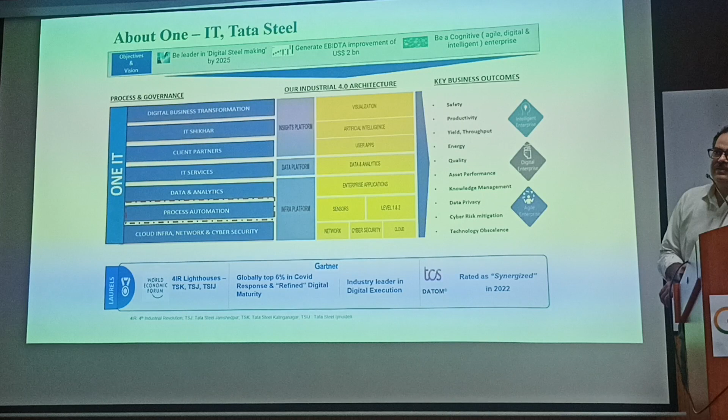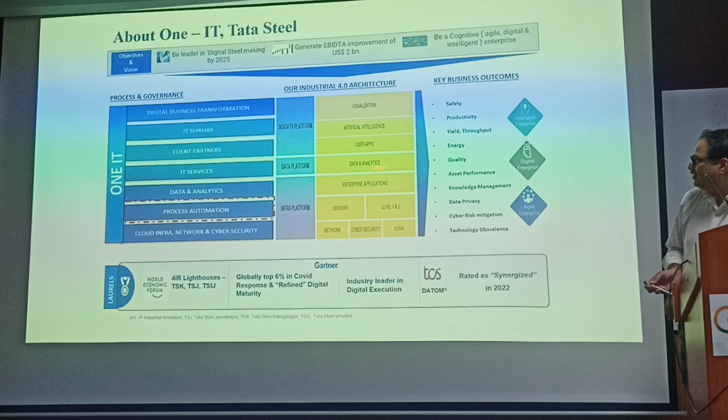Everybody must be familiar with OSI layers of communication. In industry, for our purpose, we have divided our different connecting levers into 7 layers. It starts with network, then level 1, level 2, then enterprise application, data and analytics, user apps, artificial intelligence, and visualization layer. This is the industrial way of understanding the OSI layer and utilizing it to convert into the desired output.

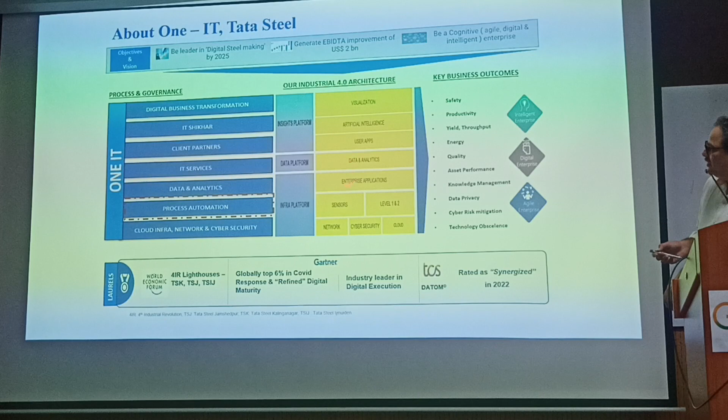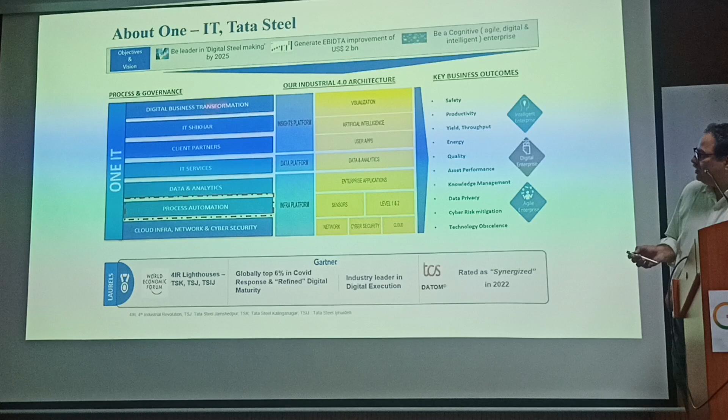And the key benefit is shown here—these are the benefits expected out of these 7 layers of architecture. All these things are supported by various experts in those areas, who are divided into various categories. So any IoT or Industry 4.0 solution needs to be backed up by people who understand that.

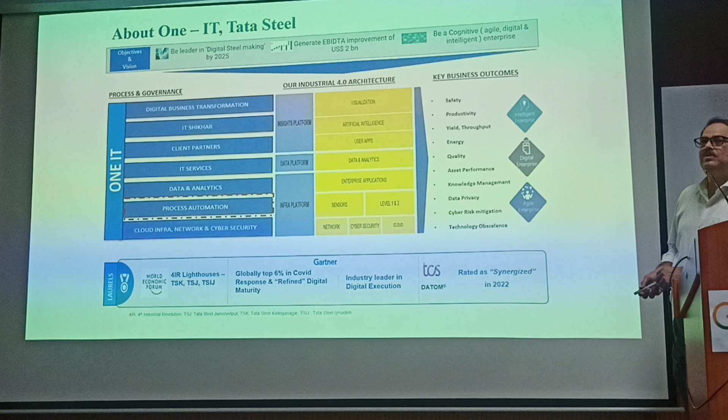So it's not that era where anybody can do anything. If you want to implement those things, you need to have people who are trained on that, who have expertise on that. Only then can you deploy all those things.

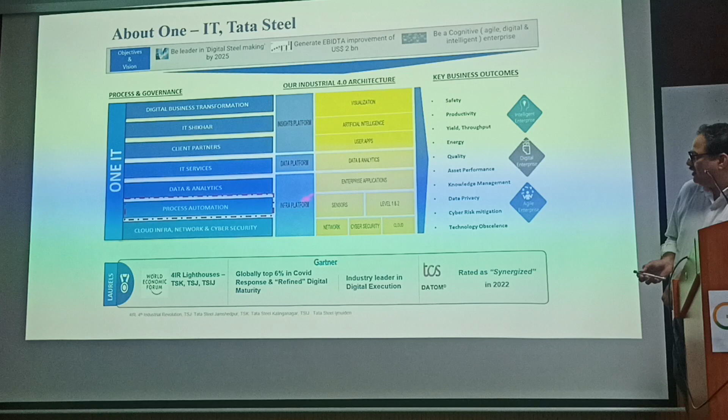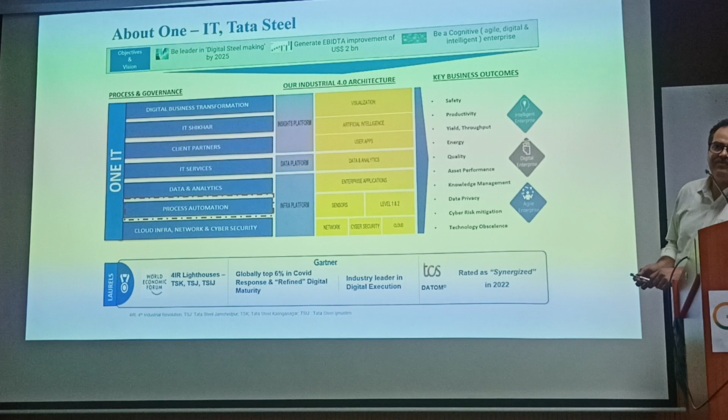We divide that into various broad categories. We call it infrastructure platform, so all those things come into infrastructure. Then we have the data platform, then the insights platform - what you are doing with all the data coming from various plant equipment, various processes, or various supply chains, etc. So all those things are divided into these broad categories.

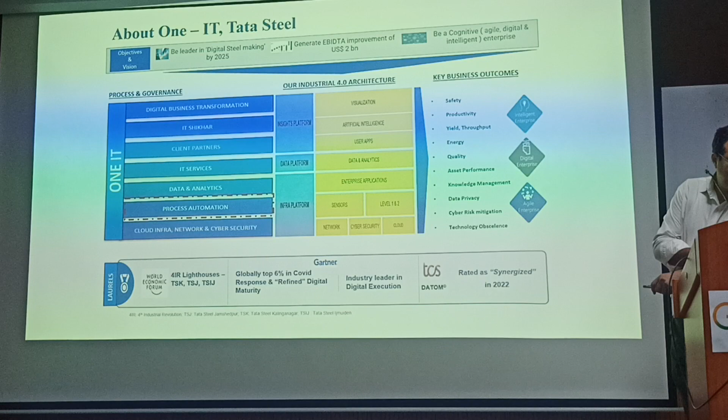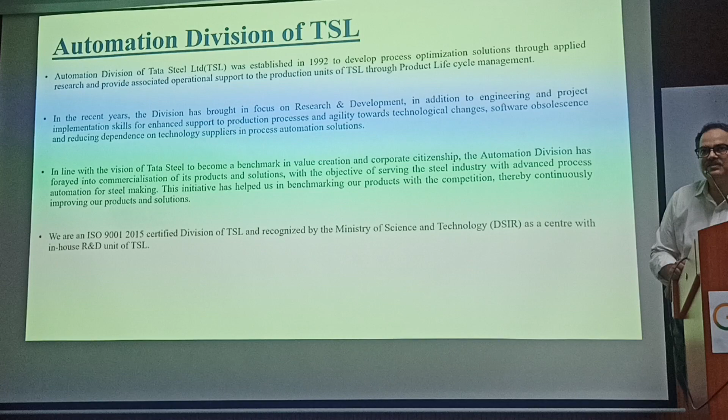So if you want to implement, or I would say the journey - this is a typical journey of any automation division, or automation initiative of any industry. We established in 1992, then further leveraged upon that. Now we are trying to do more and more research work, or try to invent new things which are beneficial for industry application.

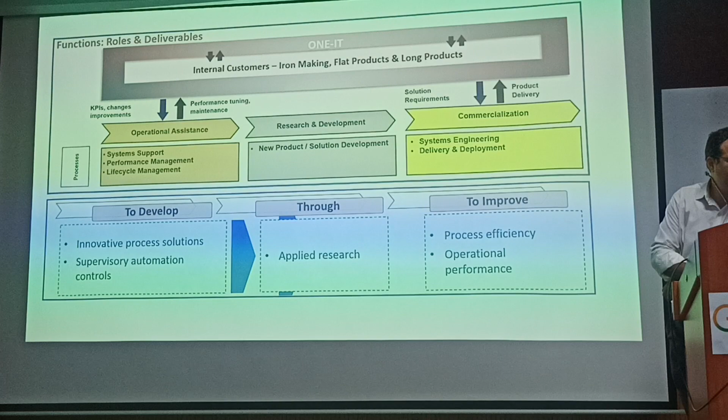So it is just depicting what our internal process is. I'll just skip through. So for any industry, what are the strengths and capabilities required which should be built up for the industry?

If you look at it, the process should be optimized for highest quality, lowest cost, least energy requirement, and least emission. Those are the requirements. For that, we build different models which support that optimization model, or optimization of process, which is called level 2 implementation.

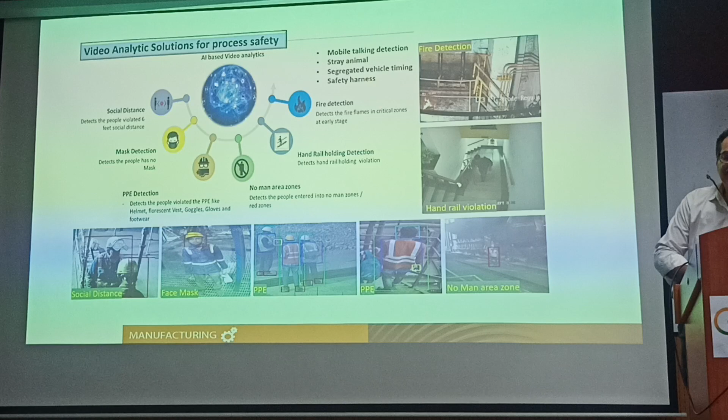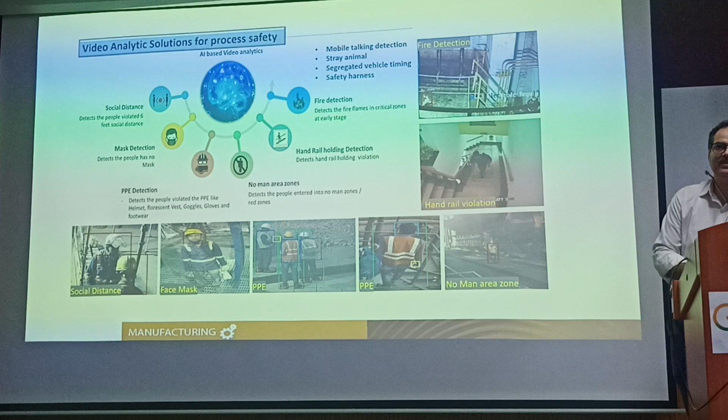So I'll now come to some of the use cases which are there for industry. In the area of safety, if you are not able to achieve zero harm to any person, then any production is not desired. So that is the prime responsibility of any industry, and industry should work toward that.

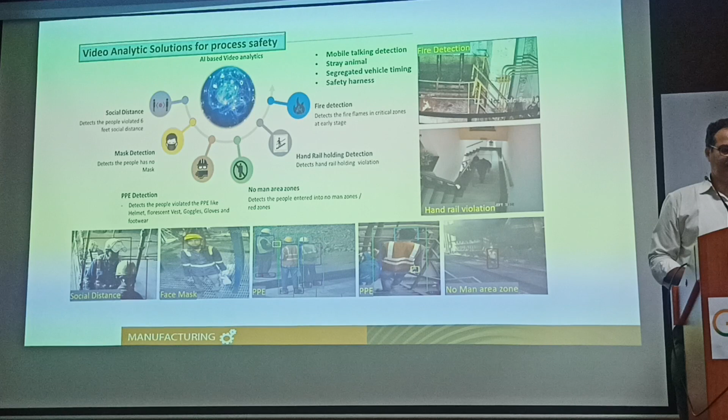So in that area we started with various initiatives, and video analytics these days is a powerful tool which is deployed across, achieving capturing of unsafe behavior or unsafe incidents or unsafe situations. In that area we started during COVID.

It was social distancing that was one of the things we could deploy with the use of video analytics. Then use of mask, then personal protective equipment - whether adhered to or not. So those are basically very much required if you are going into industry, and industry is full of various hazards.

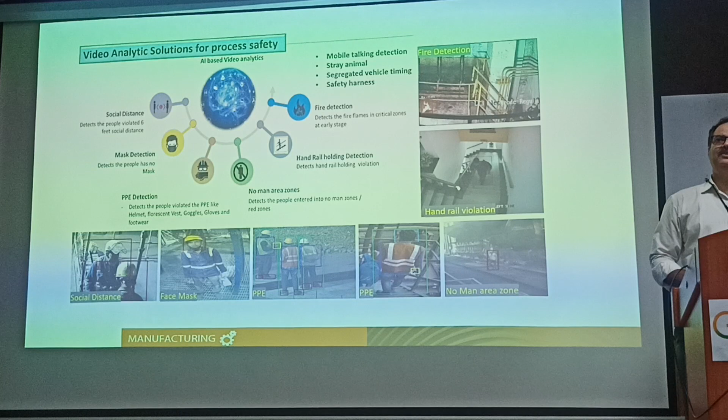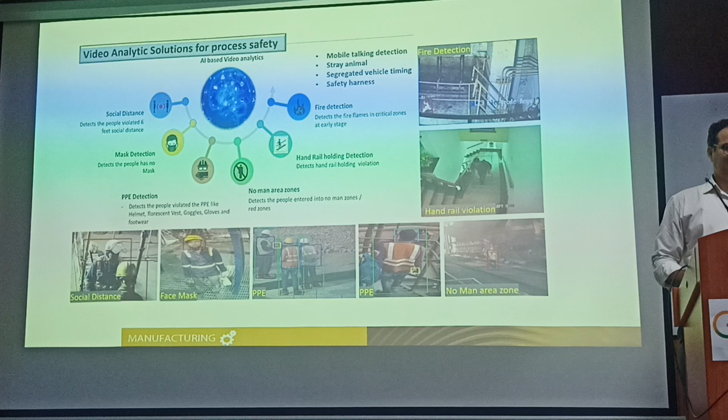So any hazardous process requires certain kinds of PPE to protect you. That kind of thing is deployed, and we are able to detect with our video analytics whether people are using it or not. If a person is walking on stairs, whether they use the handrail or not - those are things which we are trying to deploy.

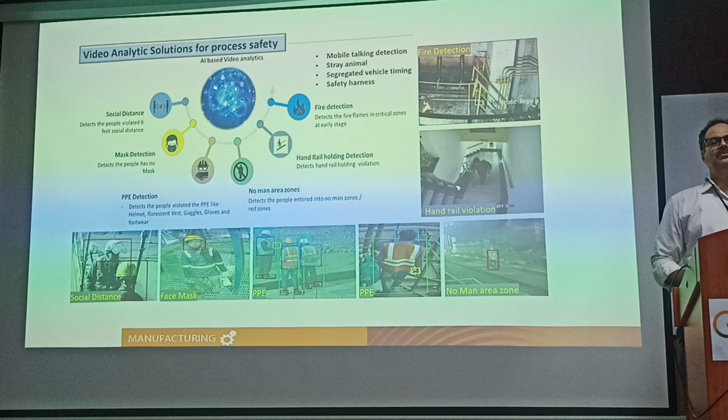Any demarcated zone can be detected if that is a hazardous zone. So we do geofencing, and we try to find out if a person is entering into a hazardous area. Those alerts are given.

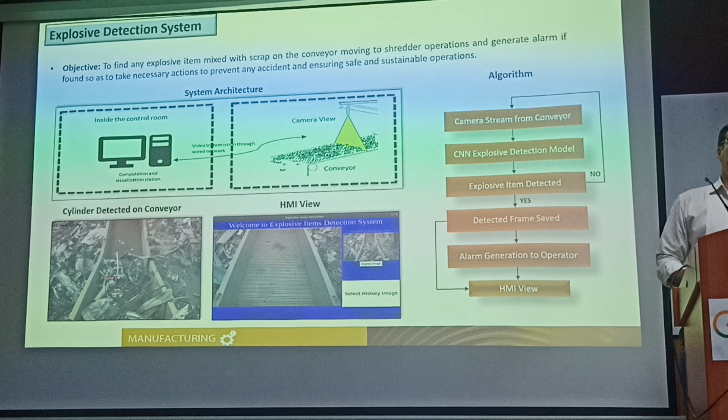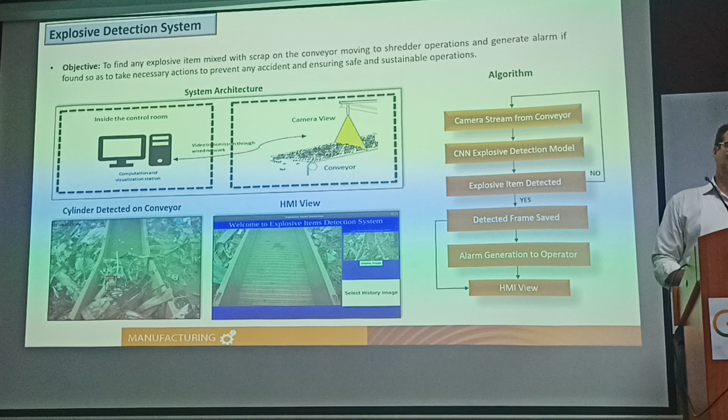Then there's various scrap material that we use as an industry, and when it comes inside the works, sometimes we find that it is coming along with explosive material. So we again deployed video analytics to find out if any explosive material is coming along with the scrap, and those are taken care of in advance. It could be explosive material, it could be radioactive material which can come along with scrap.

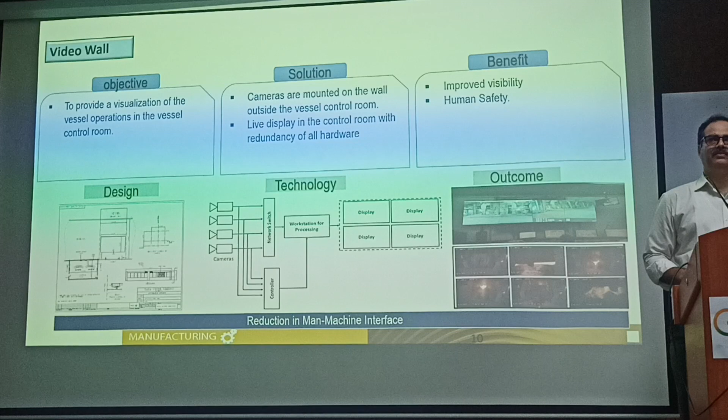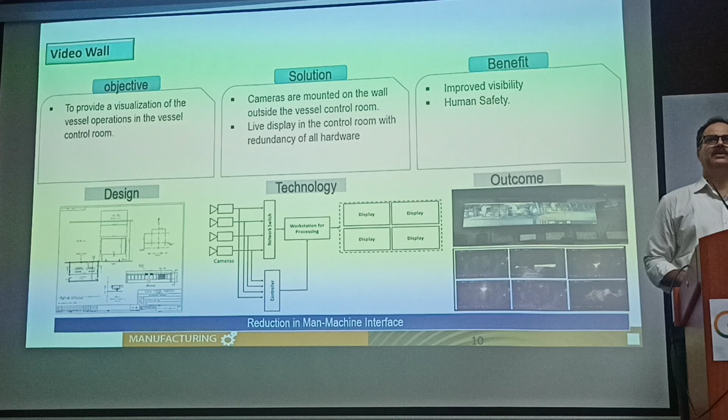So in the steel industry, if somebody has seen it, it consists of hot metal and liquid steel at a temperature of 1300 to 1700 degrees centigrade. Sometimes, due to various process abnormalities or use of some kind of inferior raw material or different raw material, we end up with an explosion or mild explosion. So nobody is allowed to work in that area.

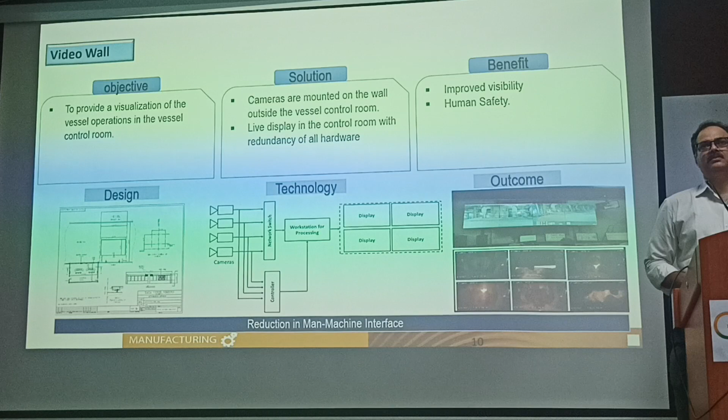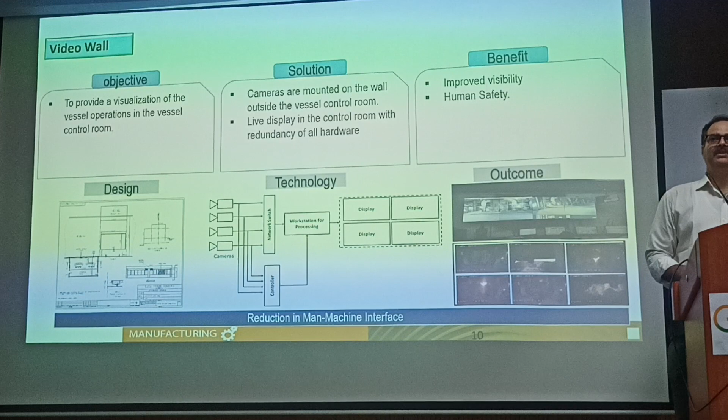The conventional way of working was that people were moving in front of hazardous processes to look at various process and compliance of those processes. That was the conventional mindset, that unless we see it physically, we cannot run that process. So in that area, we decided to stop all those things, and we have provided a video wall. Now the person is able to see everything on those video walls without going near the hazardous process.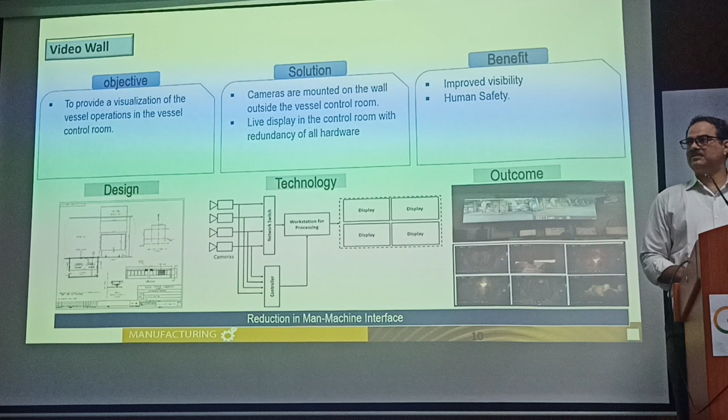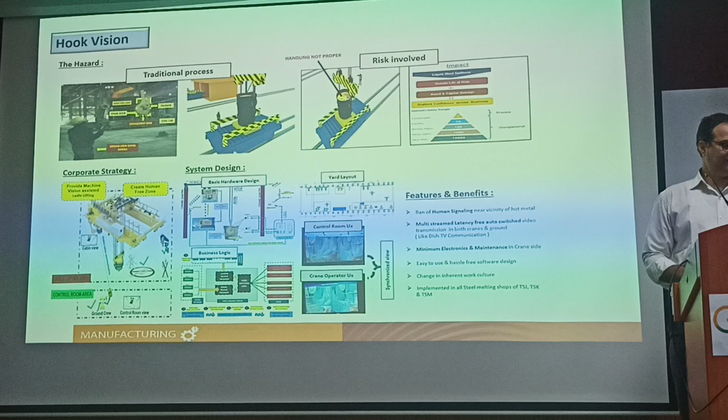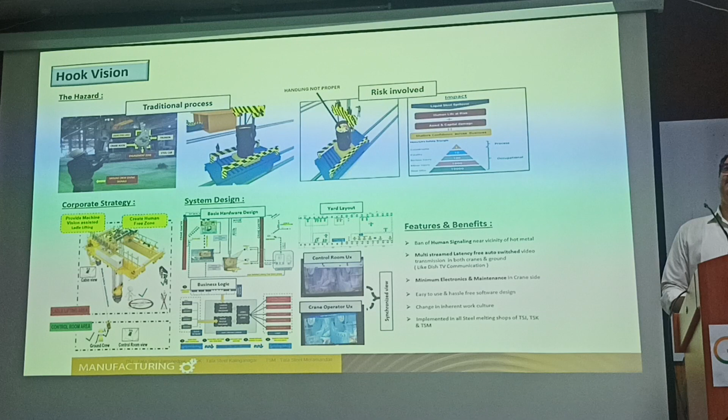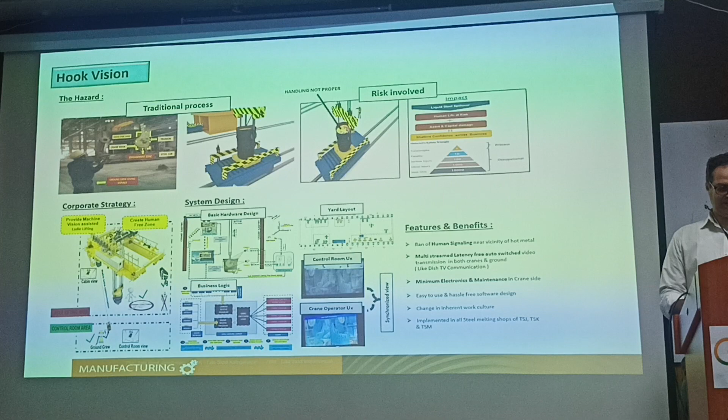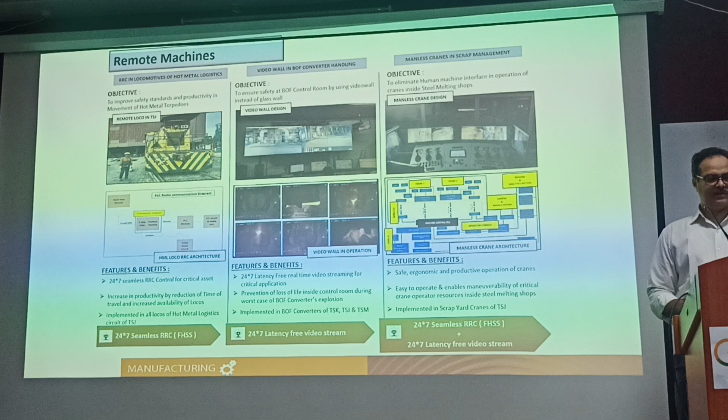Then again, in the area of remote machines, many machines now have remote operation. One of those are locos. Earlier, a person used to climb down and walk to certain locations, and during that process we had several incidents or accidents. To avoid that, now all the locos are running through remote operations.

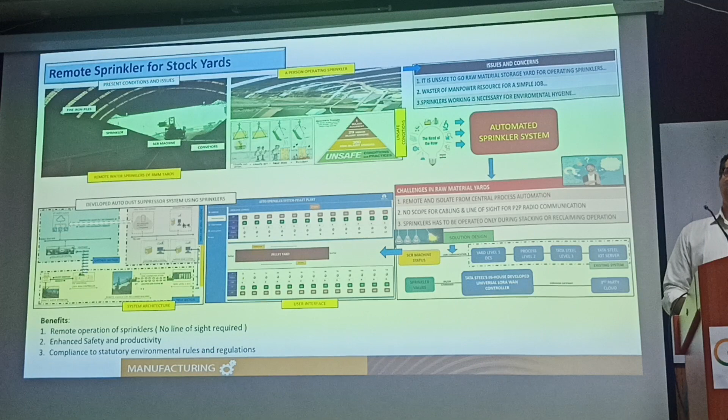Then this is again a deployment of technology based on LoRaWAN. This LoRaWAN technology is used to control some of the valves which finally sprinkle water on the yard of the pellet plant.

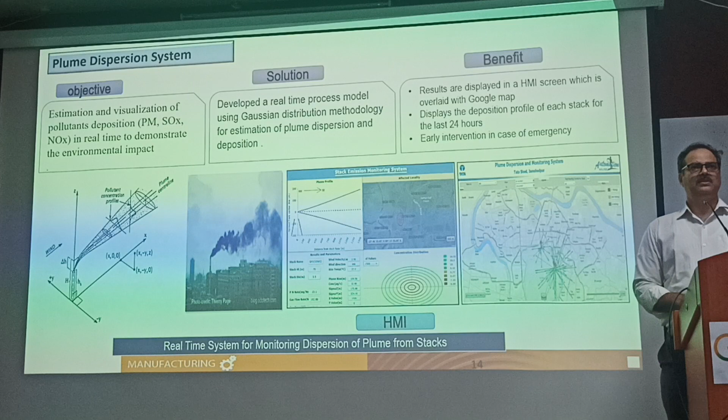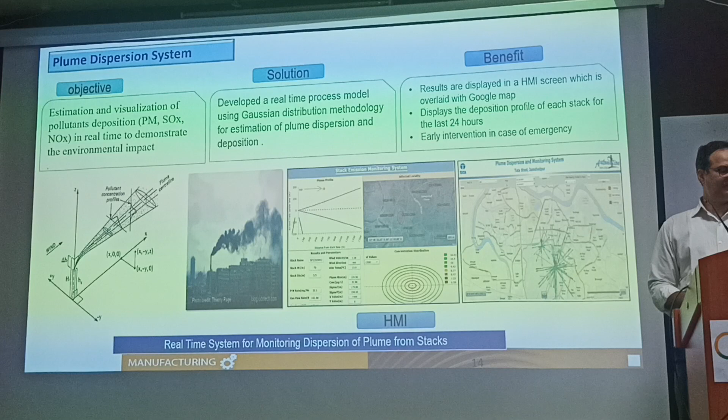This is again in the area of environment. We are able to do analysis on those emissions, and we can definitely say what the plume dispersion is and at which location it is going to deposit, or what the effect of that is. With this, we can definitely control the emissions and their bad impact.

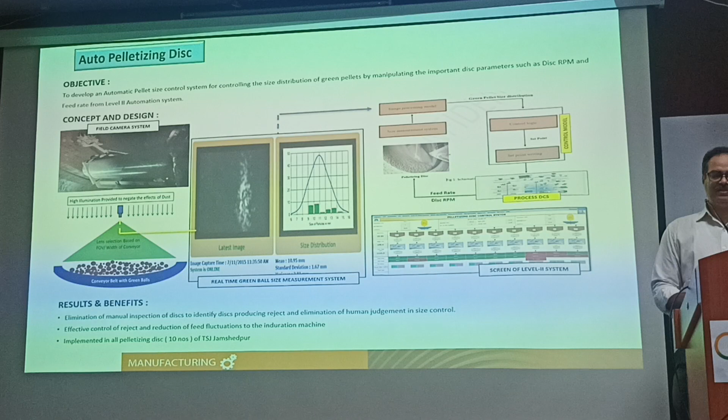In the area of mining and iron making, one example is the pelletizing disc. We are able to measure the green ball size, and we can take care of controlling this sizing and automate the process so that the size of the balls can be controlled automatically.

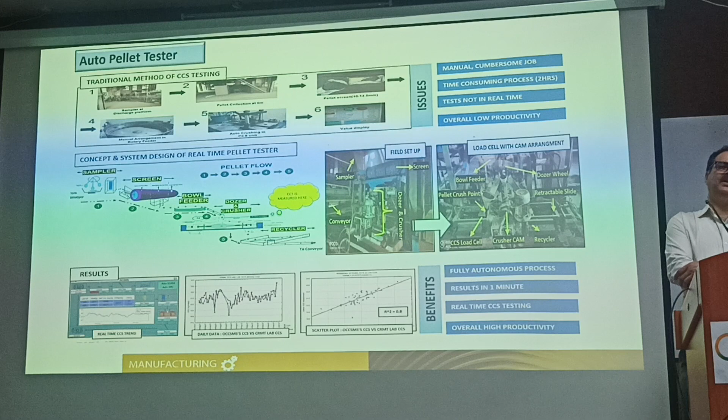This is again an example from the pellet plant, where we used to do sample testing of the strength of the pellet formed there. This was a manual process and was discrete, so from time to time people used to take samples. Now we have installed an online machine which picks up the sample and does the strength testing online. This has reduced the manual effort, and whereas earlier sampling could be done once in a shift, now we can take samples every 10 or 15 minutes and better control the process.

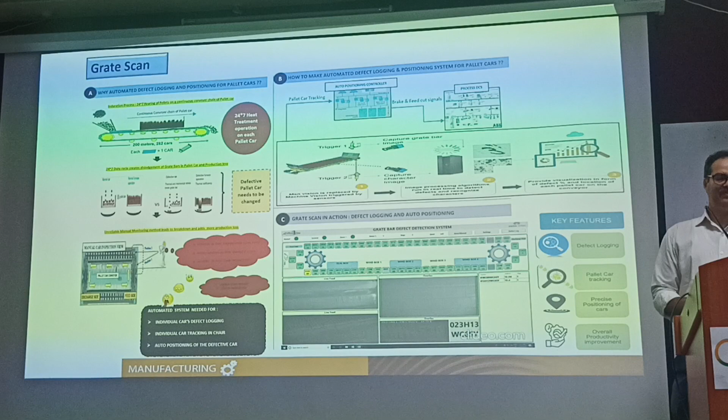This is again in the area of reliability, an example from the pellet plant. We have got pellet cars, and the availability of those cars is very important. If one breaks down or deteriorates in health, we only come to know during shutdown or breakdown. To avoid this, we have installed online scanning, which can definitely point out which car, out of maybe 150 or 160, is defective, so preventive actions can be taken.

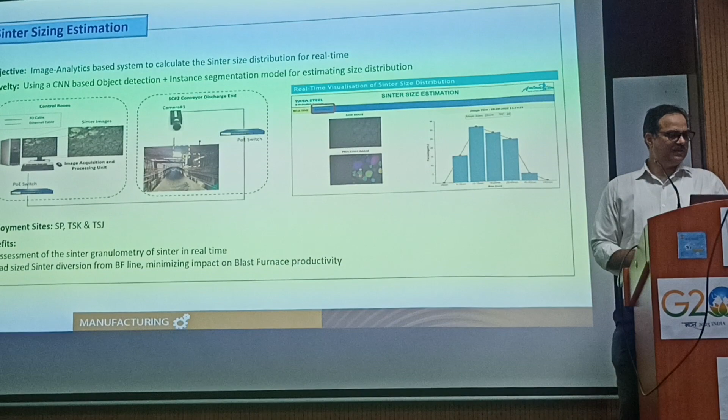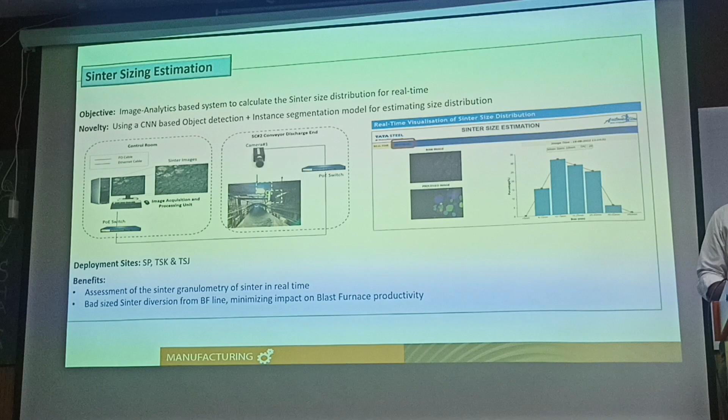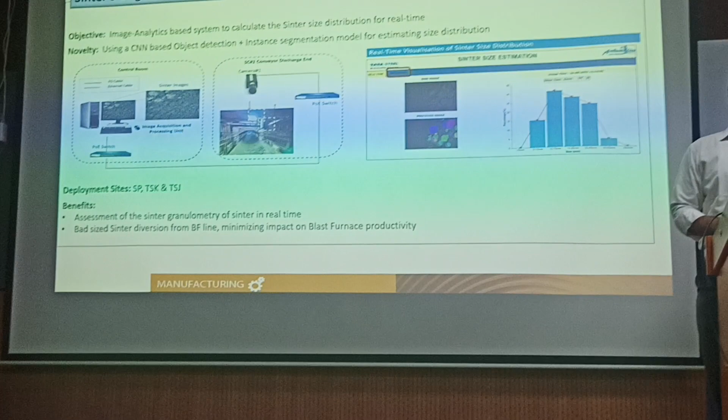Again, this is a process and quality related example. Sinter is made, and there are different sizes of sintering that take place. For blast furnace reliability, which is fed from sinter, we need to have a definite size of sinter. So for online assessment of sizing, we utilize this video feed and apply deep learning to determine the size of sinter, which can then be controlled online. For information, sinter is the raw material for hot metal making, and hot metal is basically what we call iron.

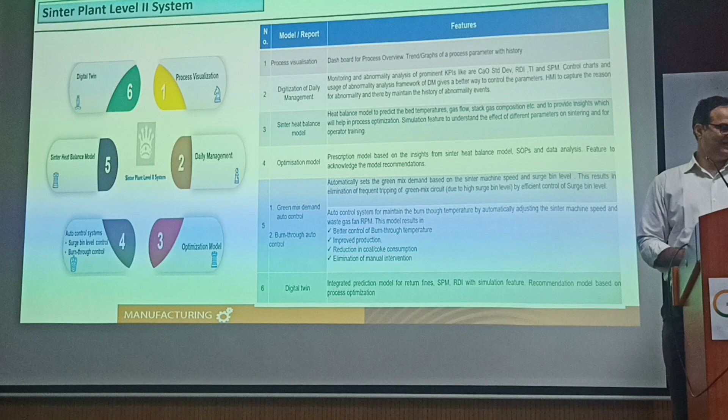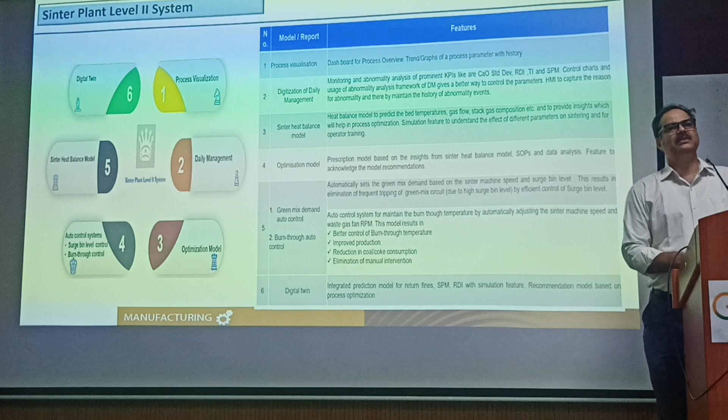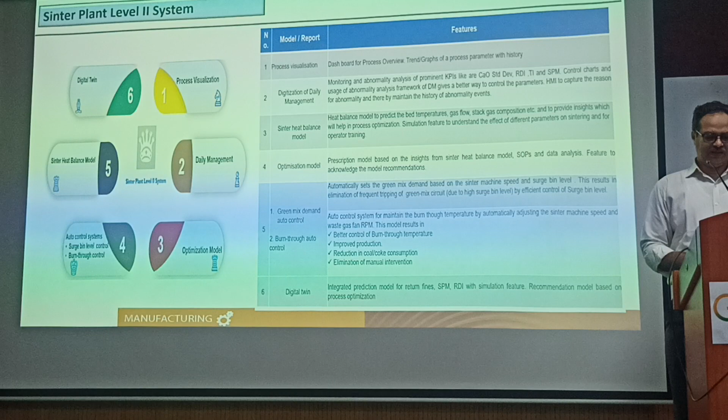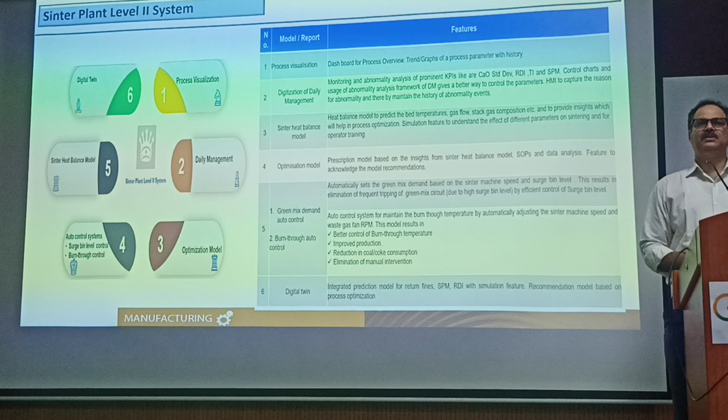Again, this is level 2, and level 2 consists of digital twin. Digital twin consists of optimizing the entire process, which takes care of quality, environmental norms, fuel optimization, and energy optimization. So those are basically part of digital twin. In some cases it was very effective in controlling emission norms. Sometimes it was felt that we need capital investment of maybe 50 to 60 crores or more to reduce that emission, which was achieved just by deploying these digital twins.

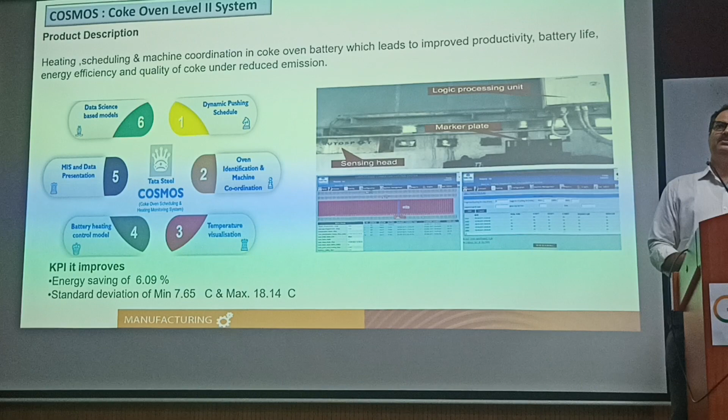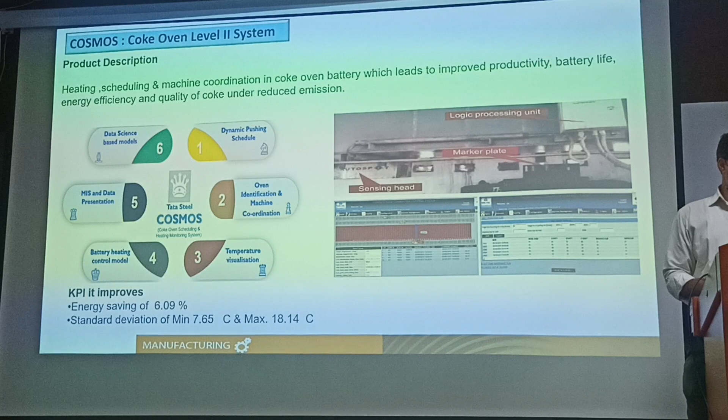This is again a level 2 model deployed in coke ovens. Coke is also a raw material, or I would say the input which goes into the blast furnace, and there are various optimization models or level 2 models applied to coke ovens. This is one example which we call the Cosmos system. It has a data science model, and it has various ovens into which we push coke. The pushing cycle is maintained based on actual coking time, etc. So those things are optimized through these models.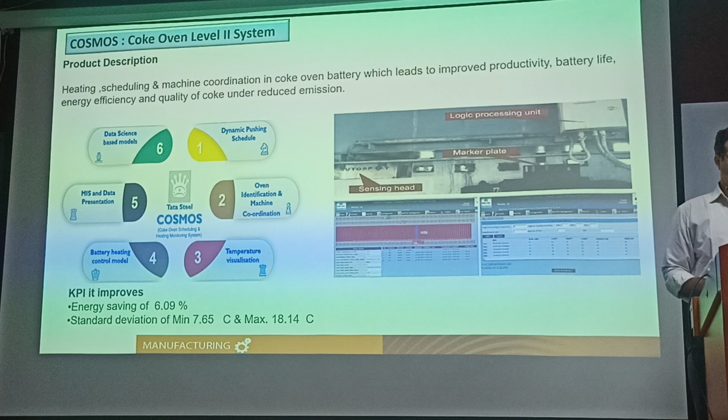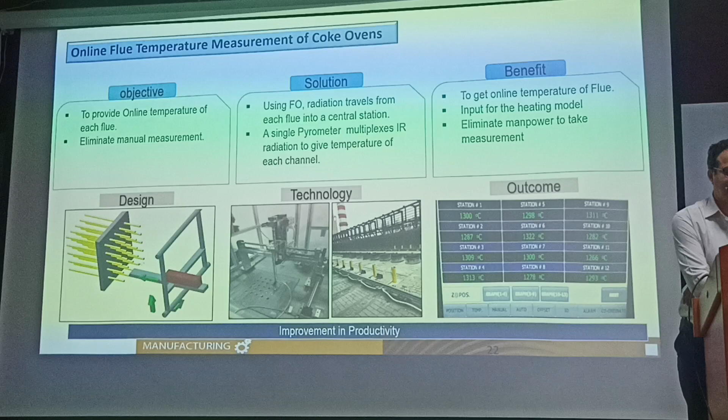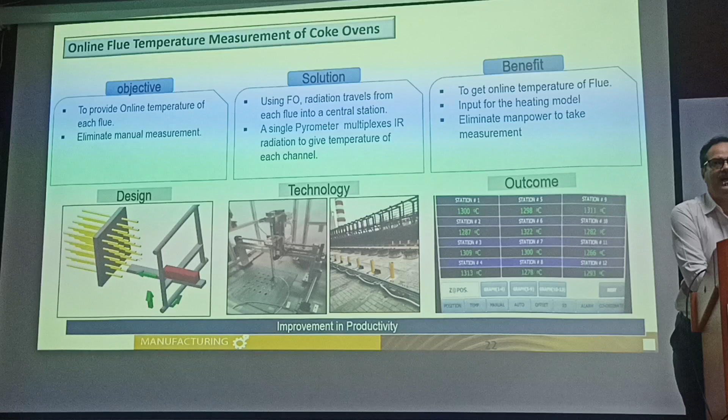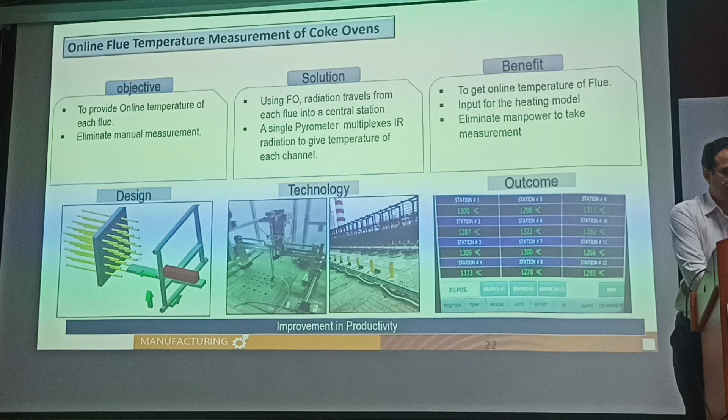This is a good example of how to utilize an asset to achieve maximum output from it. In this, we need to measure the temperature of various oven tops, using a machine that moves. If there are 150 ovens, we would need to deploy 150 pyrometers for that. So instead of this, we deployed an individual fiber optic cable running with the machine, going above the battery top and sending that signal to a single pyrometer, which acts as a multiplexer. So one pyrometer can cater to all these batteries. Using only one pyrometer, you're able to determine the temperature of multiple ovens. That is maximum utilization of equipment.

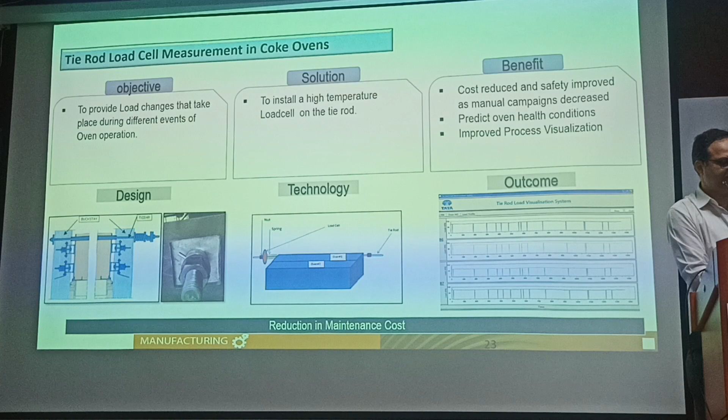Again, this is related to reliability of the oven, how to determine if the oven is having some issues. So load cell deployment on the tie rod takes care of strain and stress on those ovens. And you can do advanced planning to take it down and maintain it so that we do not land up into any catastrophic outage.

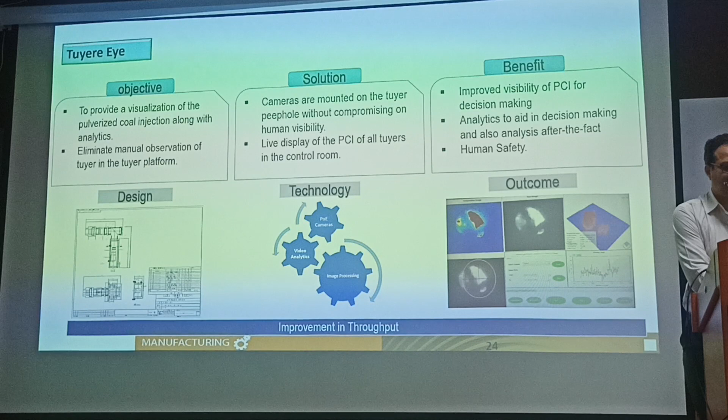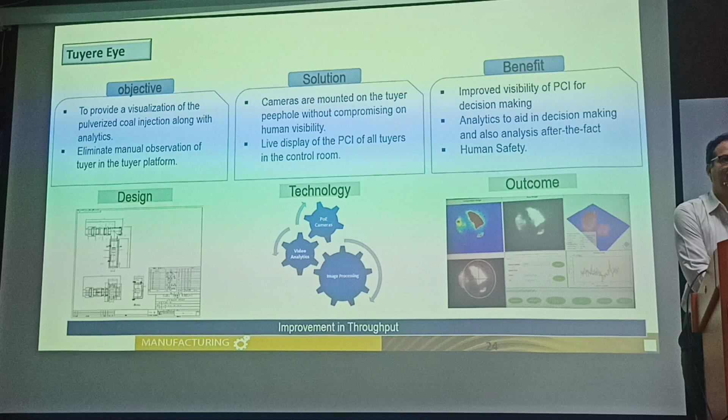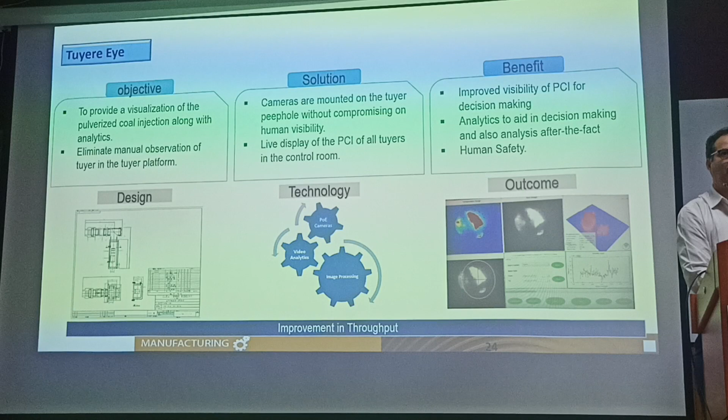Tuyere Eye is a good example in which, in the blast furnace, we blow hot air through, which is also required for hot metal making, and there we also charge pulverized coal. So how these coals are getting charged, whether it's done efficiently or not, and any other abnormalities can also be seen. The challenge is that in front of this there is hot metal, so how to see that hot metal area without getting affected by those temperatures. It's beautifully designed, and people are able to take meaningful output from the readings coming from the visuals inside the blast furnace tuyere area. Many breakdowns can be avoided, and process efficiency in terms of PCI use is also achieved.

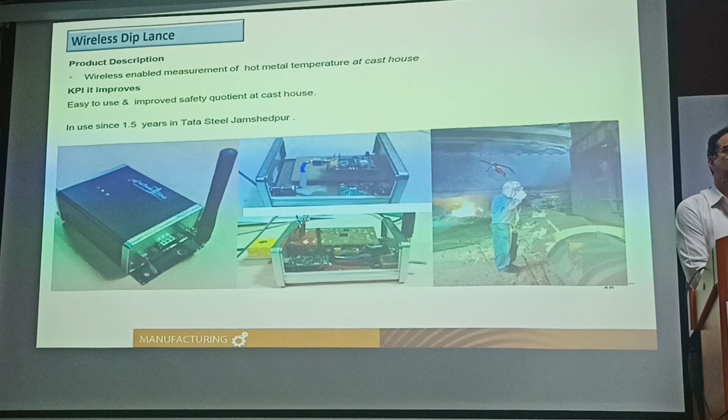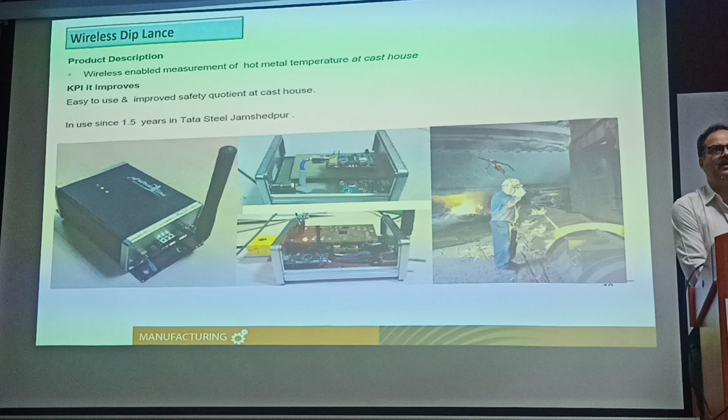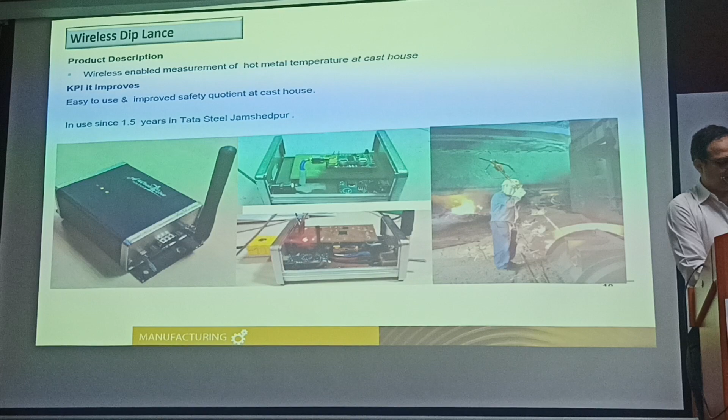This is an example which is still a manual process. People go and take the temperature of the torpedo which contains hot metal. Earlier, people used to carry a big temperature lance with a long trailing cable, which was a safety hazard for slip, trip, and fall. So we converted it into wireless technology, and now those things are used without any slip, trip, fall hazard.

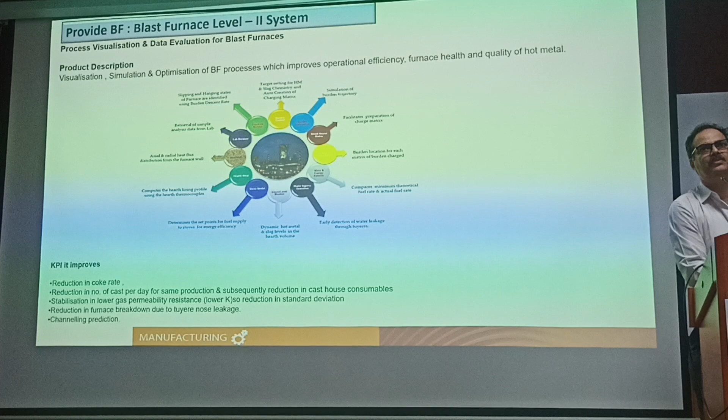This is again a level 2 system which basically models the entire process, and various parameter optimizations are done to achieve process efficiency.

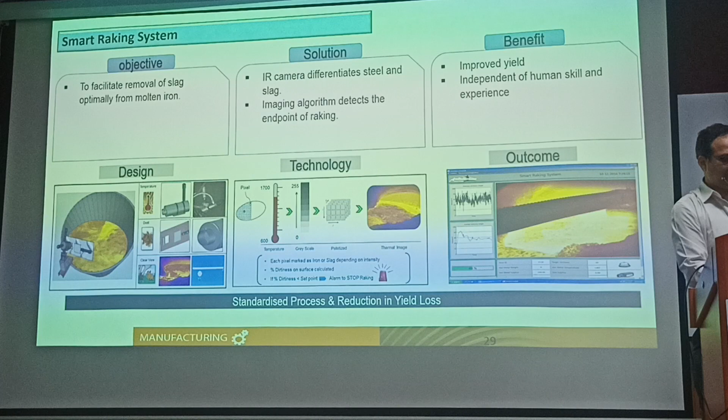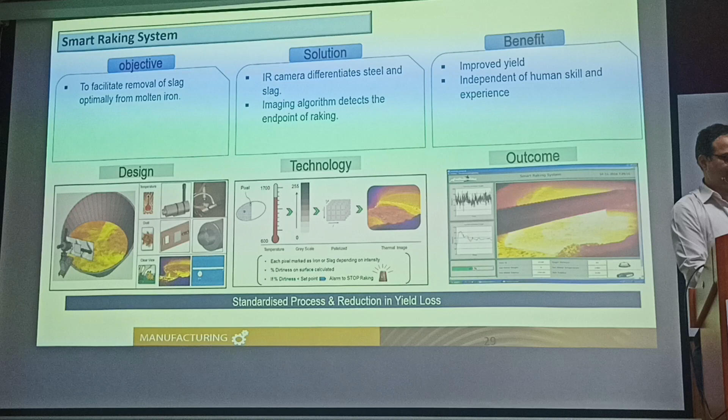Coming back to steel making, the hot metal is finally converted into steel. When the hot metal comes to the steel making area, it is full of slag, and slag is a determinant for steel quality. So it is removed, and when removing it, it was based on manual judgment as to how much to remove. To assist the operator, we deployed an IR camera which gives a clear picture of what is the leftover slag, and the operator is able to take a proper decision. They do not do over raking or under raking, because over raking is a loss of hot metal, and under raking is a loss of quality.